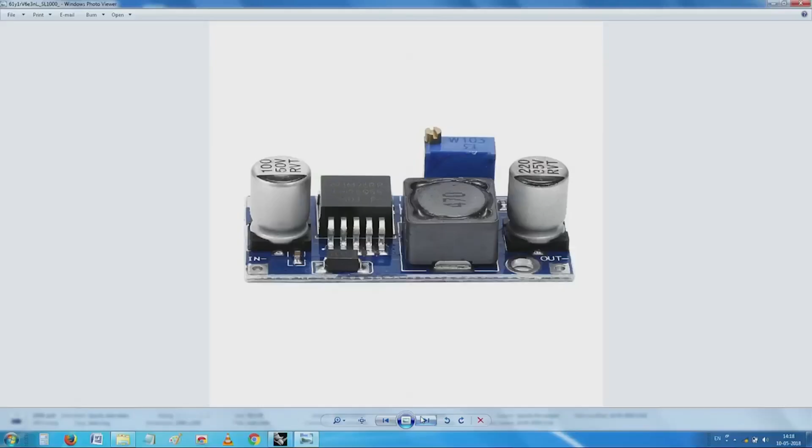Hello. So, though this lecture is a little to do with 3D printing, we still have a starting point where we need to start. I just thought I will remind you from where I left off here. You see here, this is the original 3-pin series pass regulator.

You will notice here in this case wiring and the whole thing is relatively easy. All I have is I need to make a little bit of insulation here. I have heat shrink sleeves, then there is a reverse protection diode, and the whole thing has been nicely enclosed in an aluminum box. You see here, and I have an advantage here. The moment it is made of a conductive material, in this case aluminum, this whole thing is very cheap. Probably to fabricate it costs very little, and then in the shop maybe it can be sold for 1 rupee, because it is not any specially designed extrusion.

It is just a long aluminum C channel that is cut, and then a hole has been drilled. Only thing is, in this case for our safety we have made a special clamp-like thing, and we have pasted it, to ensure that there will not be any shorting. So, overall a linear regulator is very cheap, there is no problem, and the main heat dissipating component can form the box also.

However, when we switch over to any of these elements, like these two elements, these are all switching regulators. You have seen this, no? It is about the same size as this, there is no problem. That is the reason why in fact I picked it up. The switching regulator also is about the same size, except that it is full of electronics and full of places where it is likely to get short circuited.

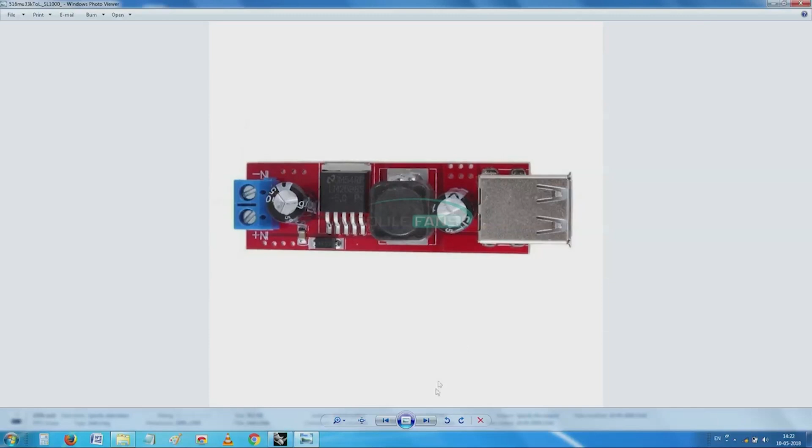So, in this case it is probably relatively easy for us to just fabricate a cover, and there are no electrical connections involved. In fact we can make a tube-like structure, perhaps take a tube in which we can push this through, and on one side we put an insulator, and overall we are in good company. Making an enclosure with our rapid prototyping for this is relatively simple.

All we need to do is take the dimensions of the box outside, this dual USB thing, and miraculously they have made all the dimensions such that everything is within that height. So, a tubular structure is easy, and then the tube can stop here with a step if you want, otherwise you make an opening, make a barrier, and then you have in and out like this. There is absolutely no issue about it at all.

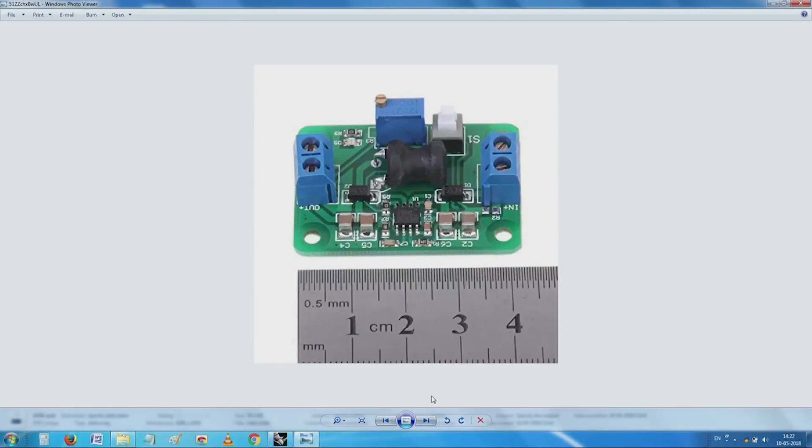Now, you see this is a slightly different thing, similar concept, except that both in and out have these screw-on connectors. The advantage of screw-on connectors is no more wiring is required, no more soldering is required. So, if I make an enclosure for it, I can ensure that the enclosure nicely sits here, and again for our... sorry, I hope I have not deleted it.

For our convenience and to avoid engineering drawings, I will tell you why the engineering drawing issue is. In fact, they have put a workshop scale and photographed it, saying what you see is what you are likely to get. So, it is easy for me to see that this right edge is going to be around 42.5 millimeters, absolutely easy. And then the same thing with the other dimension also.

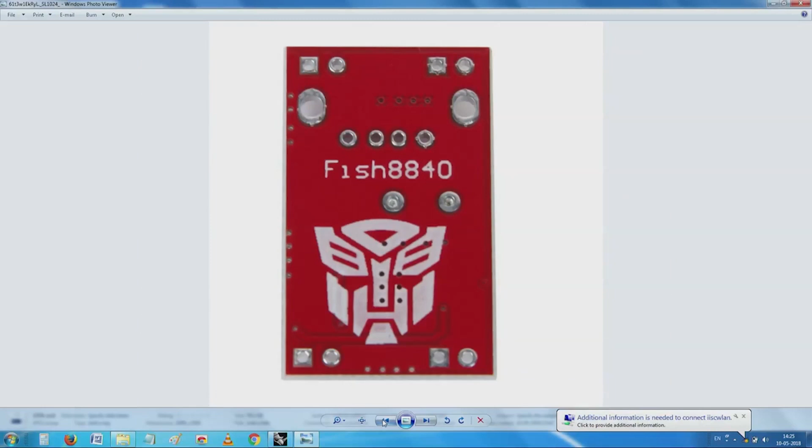Now, you see at the back, we have again the same 2 mounting holes, and there is a provision here for probably a heat sink. I won't say it is a heat sink, if you go back you will probably check whether something else is included in that. You see here, yes, it is for a heat sink only. So, we see here the actual chip is here. This is a toroid, or a transformer to increase the thing.

So, after you look at it, these 4 holes may be for via holes, and then you see carefully everywhere this red thing represents the copper. So, this copper has been made such that things are very nicely done. Now, let me stop here and show you these 2 things. Have a look at these 2 things.

Sir, can you get us a closer look? They look about the same, is it not? If I now twist it, they look about the same, except that when I turn it over, you will notice that the mounting holes are opposite. It is not about twisting it. If you twist it here, you see, still they come in the opposite direction. So, this is the case where making a general purpose enclosure is a little problem, where our thing will help.

Can you see here, we have the mounting holes here, one hole here and one hole here, top left, bottom right. In this case, top right, bottom left. So, if you follow the particular sequence which I have shown you, including the outer enclosure and all that, then have a look at these components here also. You will notice that these capacitors are taller. They are projecting beyond the surface.

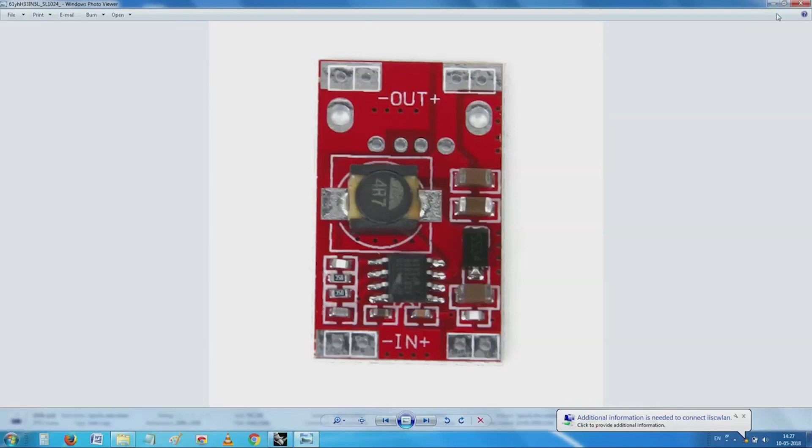This is where it helps for you to modularize your design. Have an outside box, have the mounting studs separately, and have a heat sink position separately, and so on. Now, allow me to go back to the drawing stage. I brought you and probably left you here yesterday.

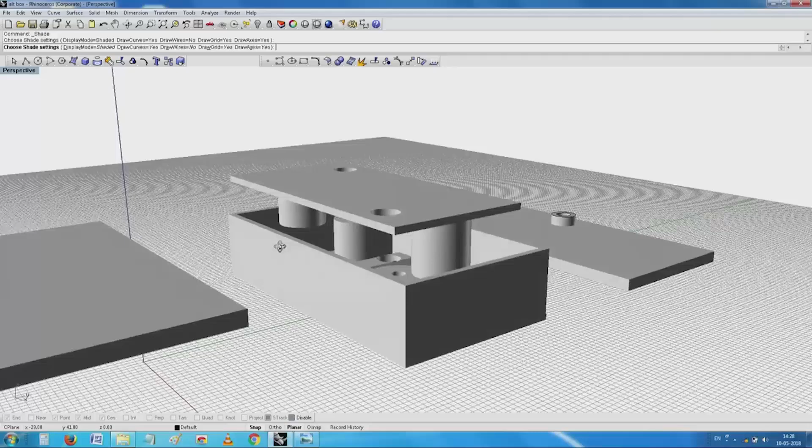So, I have a printed circuit board which has 2 openings here. Then I have a small aluminum plate, just loosely shown as if something is attached. It is not attached actually. If you go and push it here, it is very convenient, it just goes on top of it. It goes and sits on top of the printed circuit board.

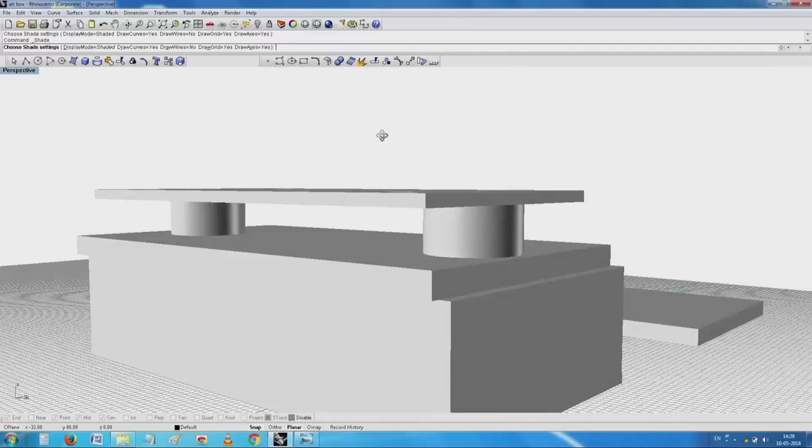And makes a contact. So, maybe if I put it in this mode and then put it in the 3D shaded mode, it will probably make more sense. So, in the shaded picture you can see there. Only for convenience I have pushed the printed circuit board up. Now, I will push it down for you.

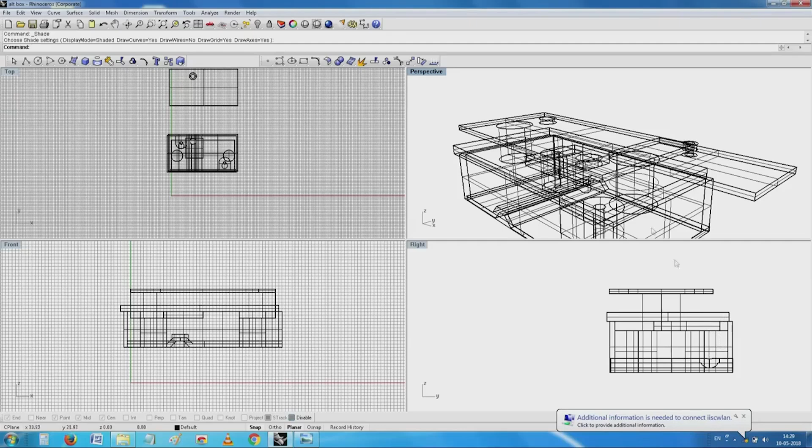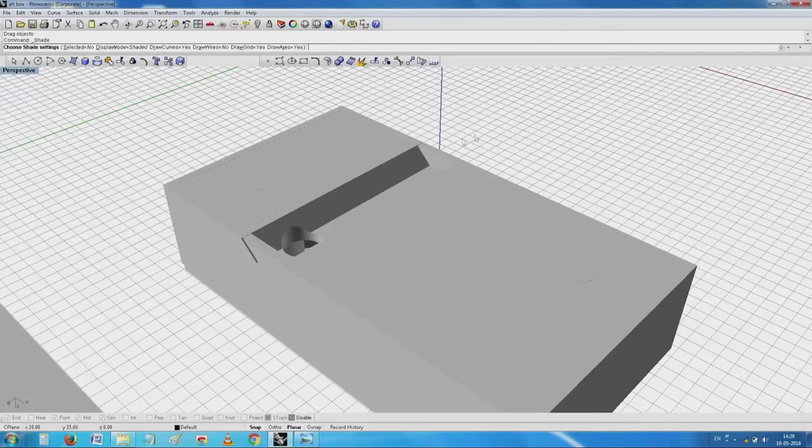And one thing which was quite okay, and now I will just show you why it is not okay, is this very fancy opening I have given here, thinking it will make it look good and maybe people will want to buy the product and so on. See this here, I had a tuning thing and then this was kept here saying it will help.

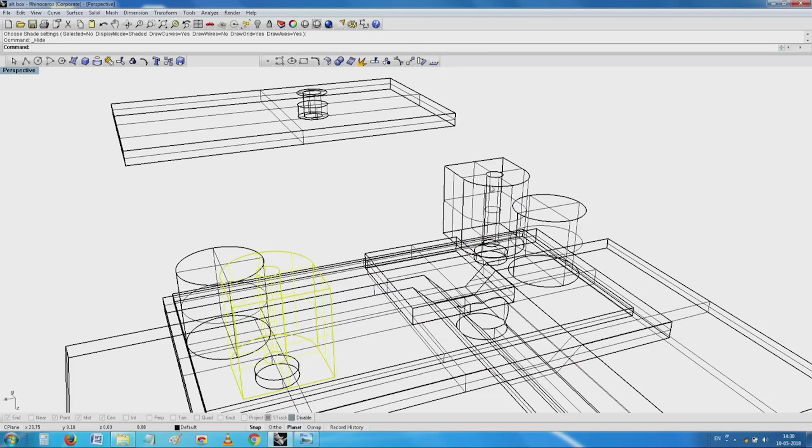Now, we come into the little bit of problems with construction of anything which involves this thing. I will now hide this to make sure that it will not interfere with our arguments. Now, you see why I have kept these bosses separate. These bosses are kept separate such that depending on the batch of the printed circuit board I have, I can move them to align with the product that we have got, because it is likely to be different. Anyway, right now I will hide them, I will hide the printed circuit board also, and just for this thing I will hide this also.

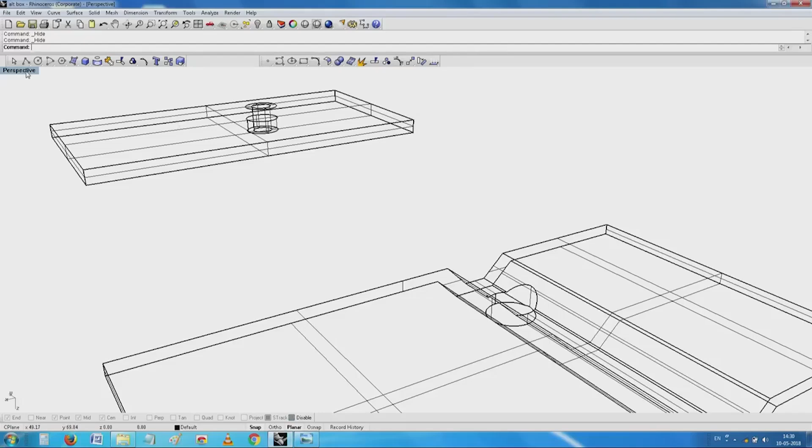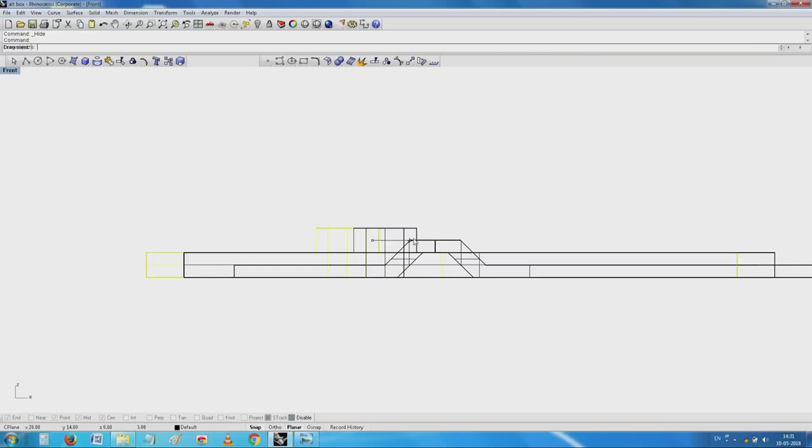Now, here we get into a very interesting, I do not know whether you should call it a problem or issue which needs to be solved. See, if I were to build a tapered piece like this, and which is again in reverse, you see it is part of the box. The building up will start now. This is the bottommost layer, the build up will start.

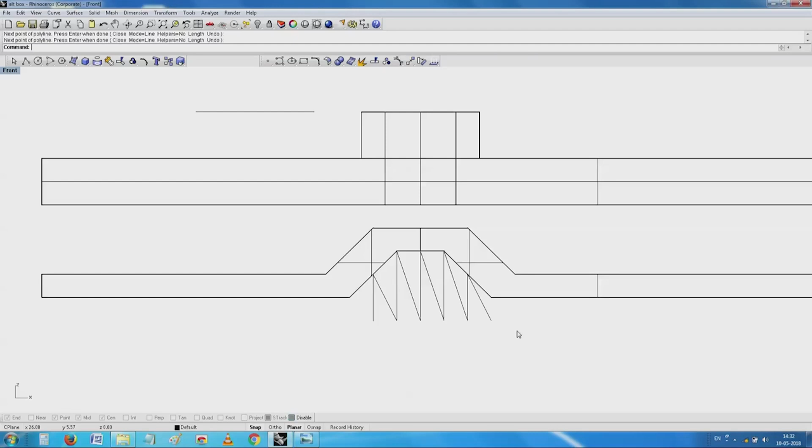Now, we have a very peculiar, you see here an angled surface which needs support from the bottom. So, the algorithm there will try to build lot of support material here. Just to make things easier, I will just try to draw a polyline, and you see if this were the base, the support material will start being built like this. Which is incidentally a big waste of effort, and further you will not get a smooth edge as we have shown here.

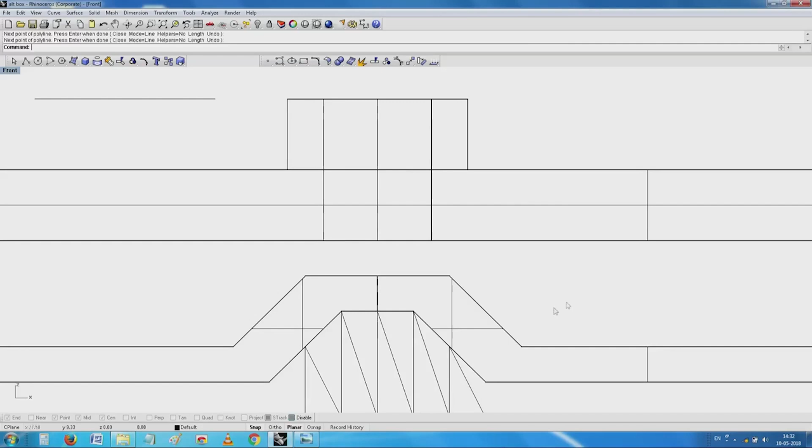It is fine because the algorithm itself takes layers, and the thickness of the layer will represent the z direction granularity, and x and y resolution will depend on granularity in the other direction. So, we may or may not be able to support. This is just a waste of material. So, is there a way of getting over this problem? So, probably the easiest way of getting over the problem is, first of all, find out whether this is really necessary. Do we need to build a very complicated structure like this?

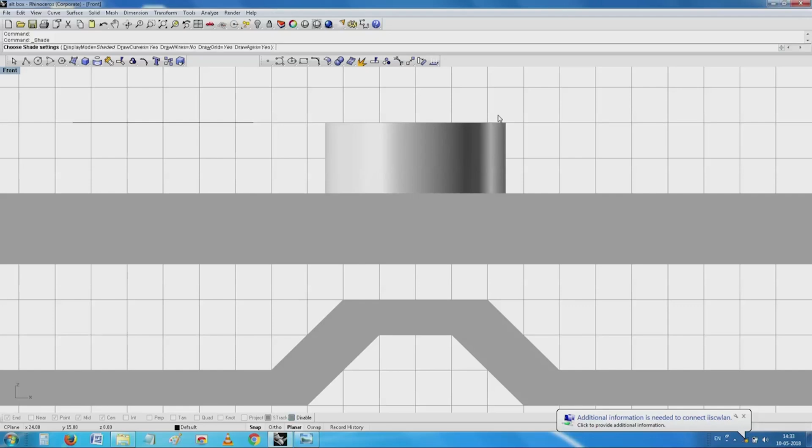Reality is no. While in injection molding once upon a time, with a little bit of aesthetics and industrial design, it made sense, similar function can easily be achieved. Instead, if you just make a cylindrical structure here like this, but then one thing you notice, there is no fillet here, and right now for convenience sake we just made it straight. Advantage being the layup will start at the bottom, and then slowly after this thickness is built up, next layers will start building here. And it does not matter, even if in the plan it is circular, it is not such a big deal for us. See, even in this view, if it is circular, it is not a big problem for us.

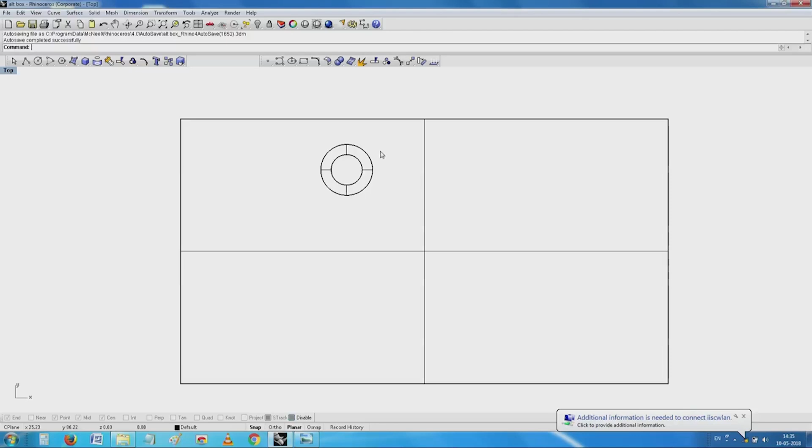So, the fused filament device, that head will start building up all these things. Once again, depending on how energetic you are feeling, probably making it a square also may make sense. Just make it a square, same way here, just for convenience I have made it a circle. Nothing prevents us from making a simple prismatic object into a square, because building up is easy. Otherwise every time it goes and comes back, a little bit of jaggedness will come here. Is there any other way? Yes, you make an octagon, make a square, or make something, because what we are interested in is the center hole here.

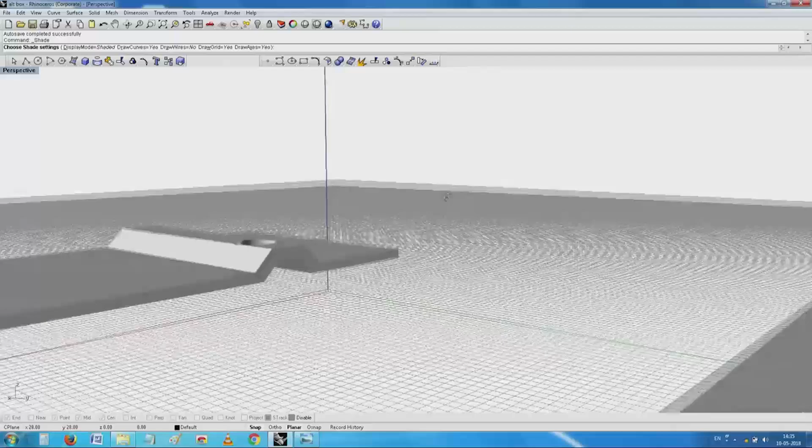Now, you see, building an object like this is relatively very simple, and the amount of support material and the amount of time required will reduce tremendously. I hope you got my point. My point being that if you make all that fancy things which are required maybe in mass production, in this case we can optimize very well to do this.

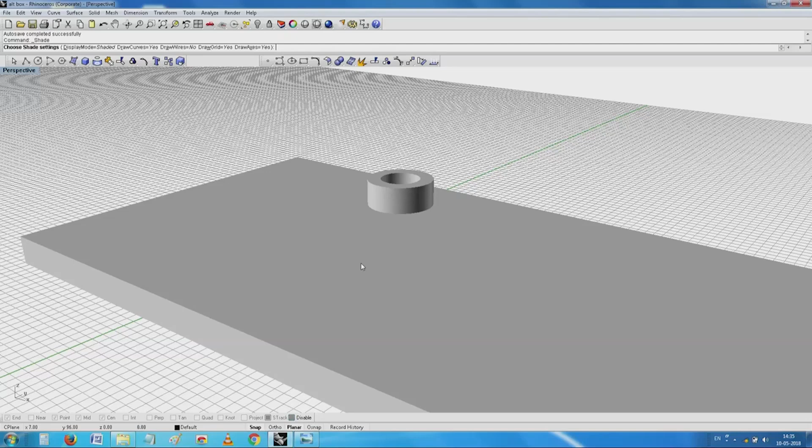Let us say you still liked the concept of a groove and it looked fine, instead of sticking to this vertical inclined thing, maybe some other way we can make. Why not convert it into a vertical channel? Maybe you can convert it to vertical channel, make it like this, and then make the hole the appropriately correct size.

Further, you will notice when I try to make a hole, the solid modeling package has made something that looks very cute. You have seen this, no? A really cute looking thing has been made, which at one level, while it looks good, we do not know how well it actually builds up.

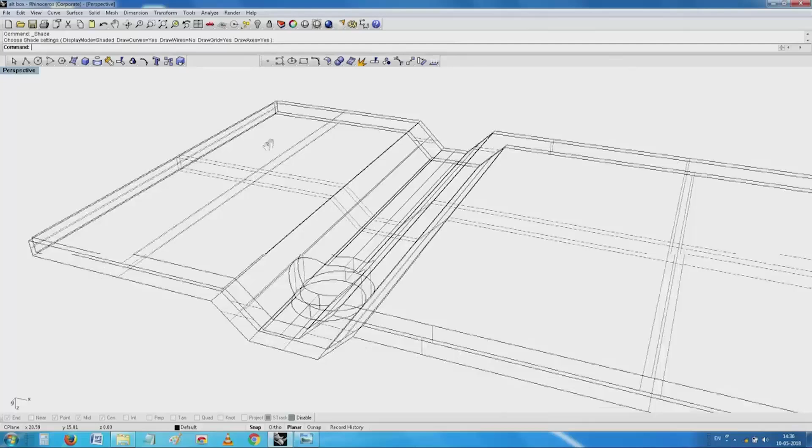See, nice, no? It looks nice as a thing, but all this here is probably misplaced, meaning you do not need that type of thing. All you require is a nice groove. In contrast to the groove, the other circular feature is equally good.

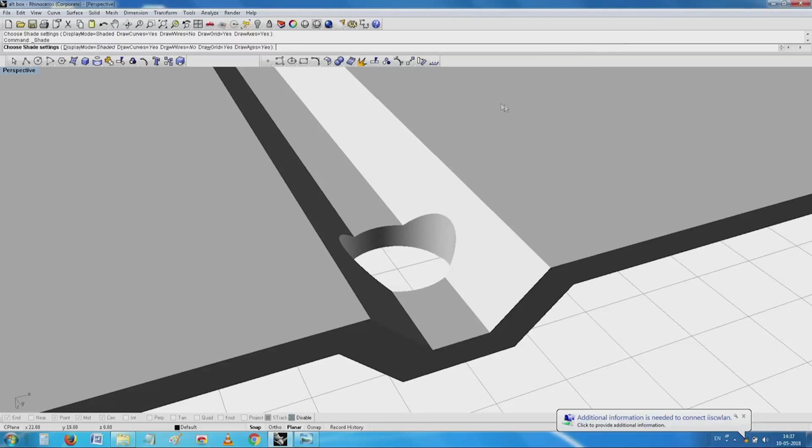Now what I will do is unhide all this whole lot and see what is sitting where, then put it together and see what best we can do. So this one, no, I will just delete it. Right now I do not want it. Okay, this stuff I still have.

Slowly I am reaching the point I wanted here. See that, except there is still some minor thing there. This top has not aligned itself perfectly, but then it is okay.

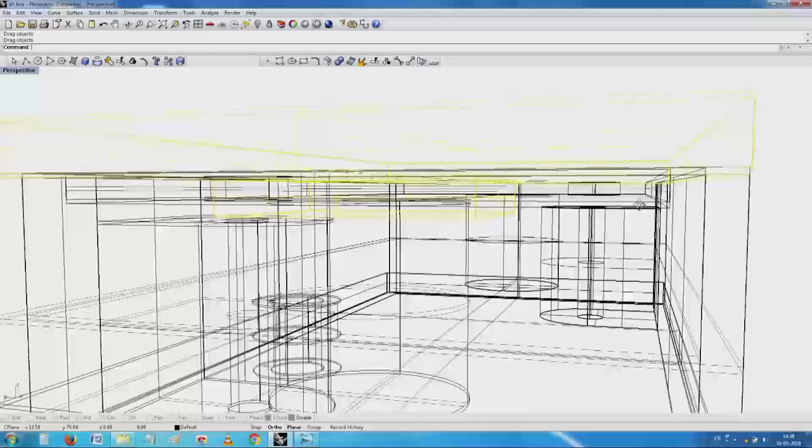I'll just put up with it for the moment. I know how to correct it. Eventually I'll put up with it. So I have got a heat sink device here.

Just fine. No, I think I'll improve it. I'll just delete it and start with the proper heat sink device, and then again one more time I will start with the surface, which will start with a plane, corner to corner.

This is my heat sink proper, this is the cover. I see if they are Boolean themselves. Fine, nicely it has got Boolean.

Now I have got a reasonably good looking box with a place for the printed circuit board to sit, and then I have got a heat sink which will go and press on that, except two features here.

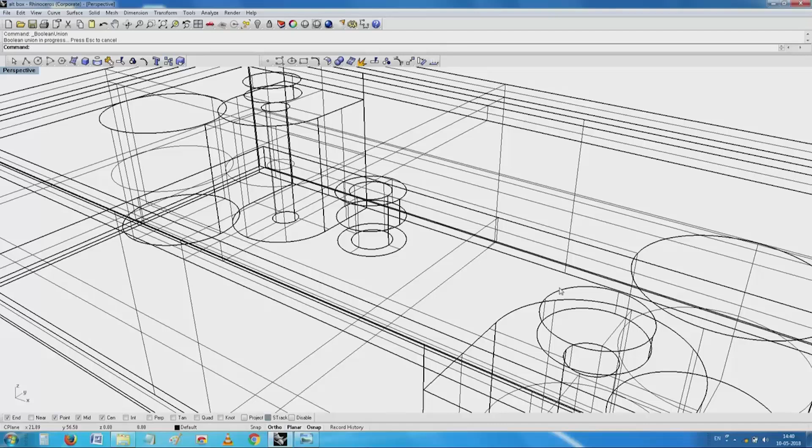That mounting hole of the printed circuit board has not been transferred here. So what I will do is, since I have got the bushes in place, right now I will close the printed circuit board, make use of these two bushes and then extend these holes there.

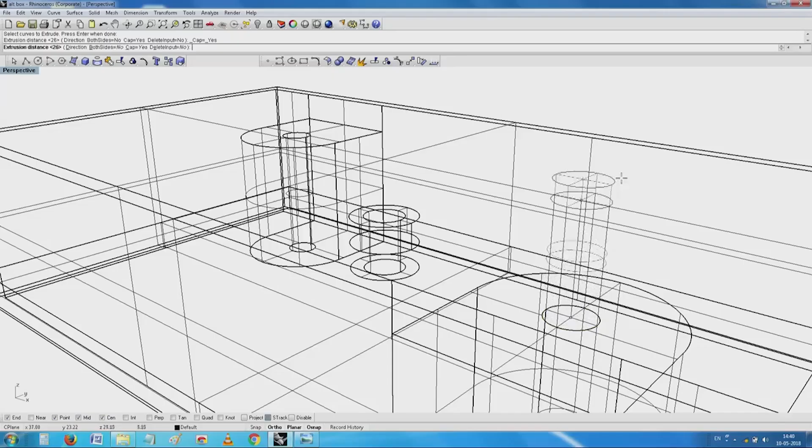So what I do is I try to create a solid using a planar curve. This is the planar curve. Same thing happens here.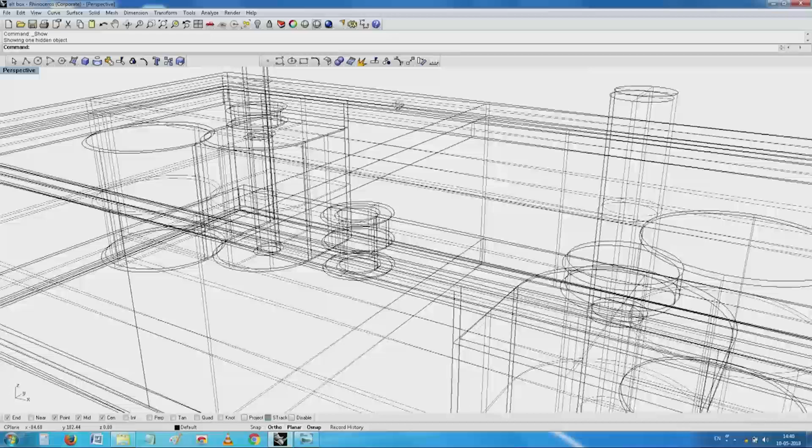You see here I have got two things which will eventually be made into this cover. So this is the cover I have created just now. So I have transferred those holes to that, then I will do the difference from here.

First set of holes, second hole I will create here. See, now I have a reasonably good looking completely enclosed box, and there is a place here for me to tune the printed circuit board.

Remember, the PCB is being mounted obviously upside down. Can you please show this, sir? I have a printed circuit board here, the heat sink is sitting from here, and the other side is where the tuning and so on will come. So the thing is being built upside down like this.

This is how the device will come, this will sit here, and because I have got these two mounting holes and these bushes, it will go and sit on the bush, and the heat sink will sit here, and the same holes which are given here are given on top.

Now I need to take a call on what to insulate inside. Do I put a small insulating layer, and something equally important is, do I pot the whole thing? After finishing this, there are thermally conductive but electrically insulating potting compounds available.

So I nicely put everything and then inject the potting, some are two-component, some are single-component things. Once you inject it and put it together, it has two benefits.

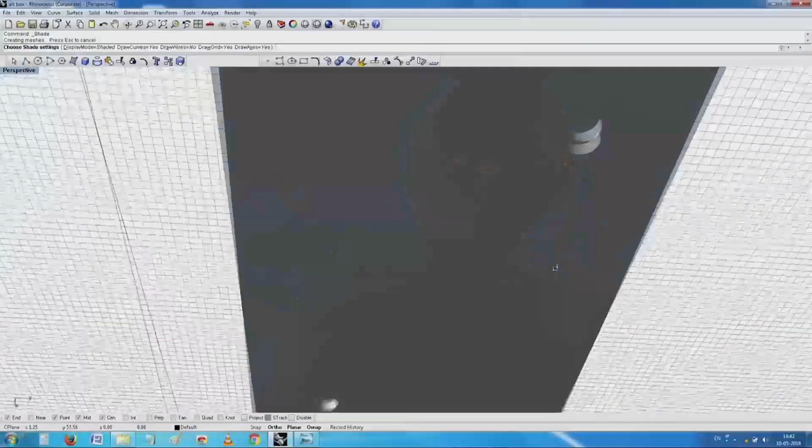Okay, that is the bottom portion. This is the heat sink part. Heat sink has holes. I will now hide this, and this is how finally...

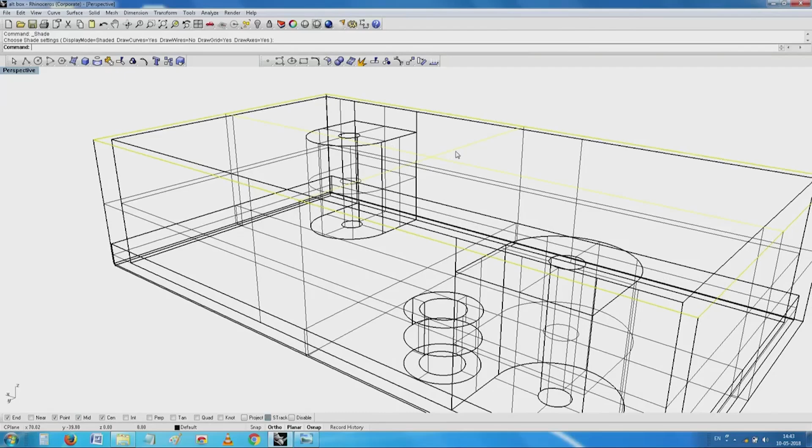This is going to be my final job which I am going to fire on the machine. It is a little simple, looks really quite nice, except the first thing you will notice is, sir, why is this boss so big, why is it not bigger or smaller. This is where you need to take a call. Logically the same amount of material which I have left here is sufficient for here.

Typically a minimum of 4mm, 3 to 4mm is required, and this hole is for having a self tapping screw which goes inside. You understand? Self tapping screw which goes inside, and this one and so on. Why I have made it a little bigger than normal is so I have a nice area where it sits, the maximum possible area, that is what I have included here. So it looks big, but there is no reason why it needs to look big.

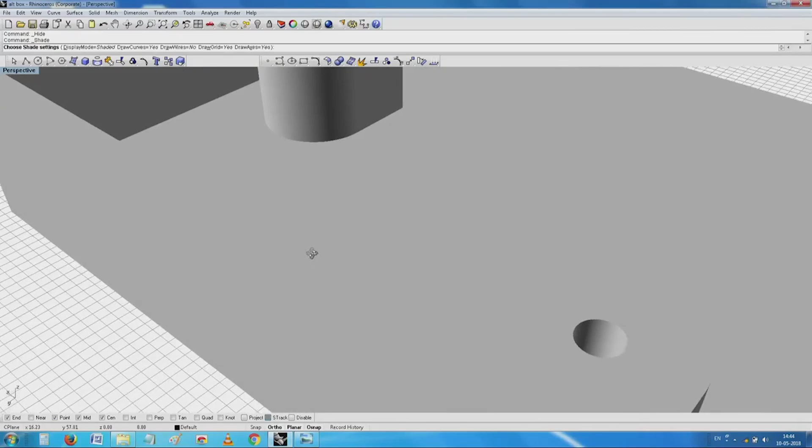The main difference between this and the injection molded part is, if we were to make a part like this in injection molding, one of the first things that will happen is, because of the large cross sectional difference, we end up with huge sink marks and the material will not flow at all. It is a very poor design for an injection molded part. But in the case of making a quick good prototype in 3D printing, this is probably the best way to make things. You got my point? This is where the slight difference is.

Right now, for some reason, this refuses to get unioned with this. I will see whether it will still continue or if they just do not like each other. It got union, no problem. Hey, very good, surprise.

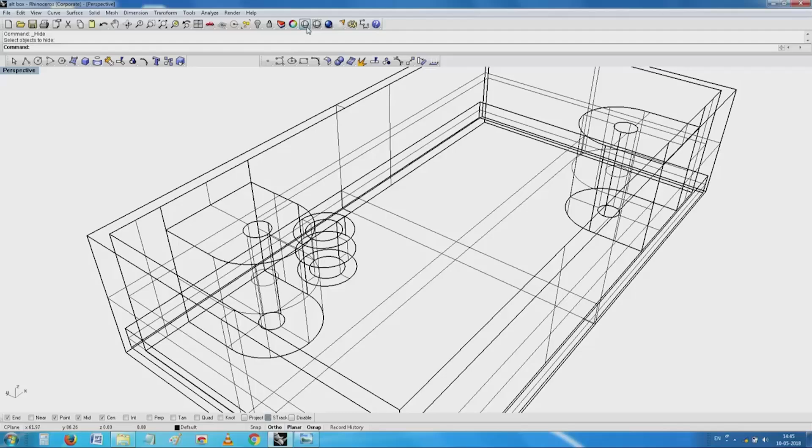So I have got a beautiful object here, the whole thing is integral, everything. Now only this bottom portion, I will see if I can attach it to this, and then I will show you some other interesting objects which you will like here, solid. Then we have a union. Good.

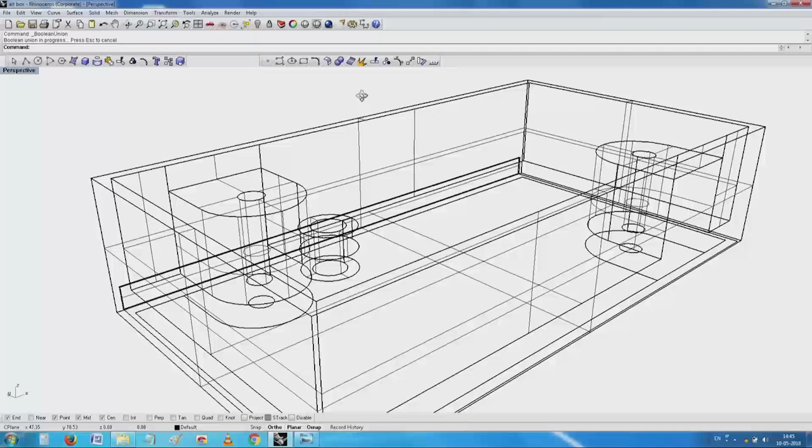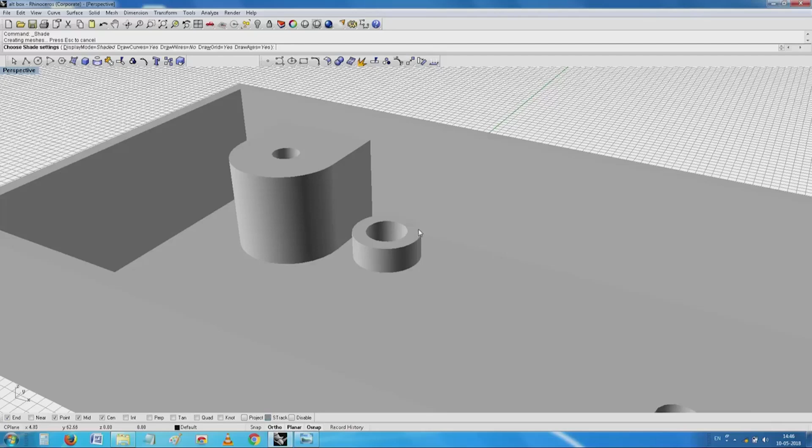A little small error has happened, do not worry too much about it right now. The whole thing has turned out to be a single object, because of a little projection probably that has happened. Now to make this a little more, let us say if this were to be made in injection molding, we will invariably end up having to give fillets here, otherwise it becomes very weak or stress concentration will occur. In this case also, if you suspect there is too much force coming here, it may be possible for us to give fillets. Okay, loosely I will try, just one surface, I will try to fillet and show you how it comes.

Yes, I have a smooth fillet there. You have seen this. I will see now whether I can do a similar fillet here.

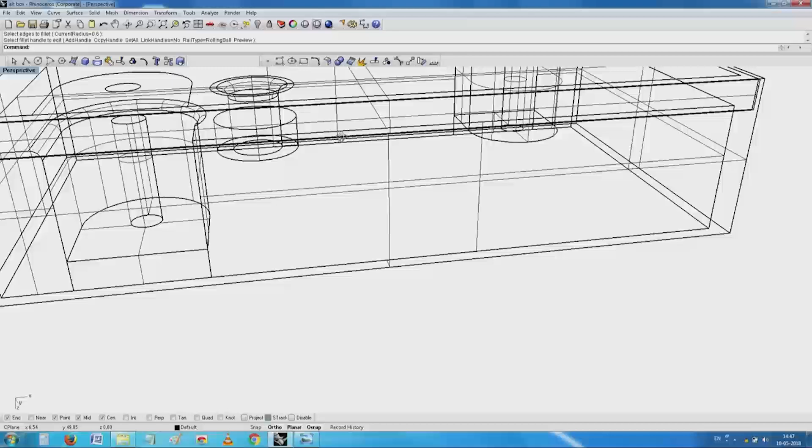Seen here, what looks like an obviously cute fillet has happened there, and correspondingly on the inside thickness, see here in the inside thickness I have one more time. This is conventionally what you are likely to see in an injection molded part, except that as I told you, it does not build well when we come to this thing. So we avoid these things as much as possible. A much easier way is to have steps. Steps are much easier to build, even chamfers do not build well, in spite of whatever the manufacturers claim.

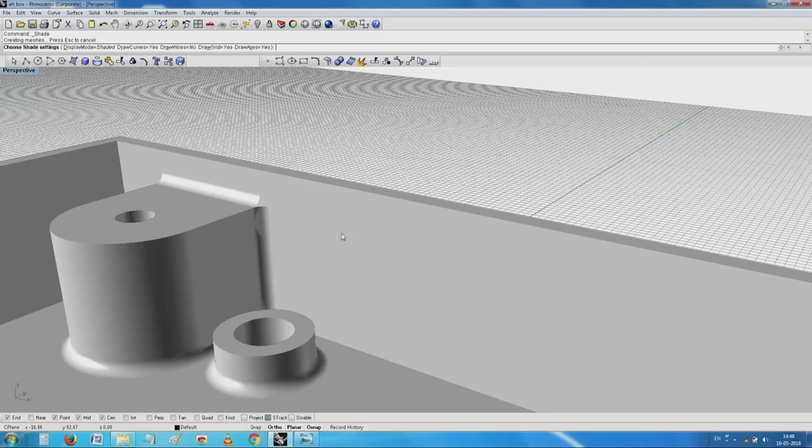See here, at least it looks nice, and it does avoid the stress concentration which is likely to occur, the same as we have in the other thing, except here now you have to take a little more care to see what best we can do about it.

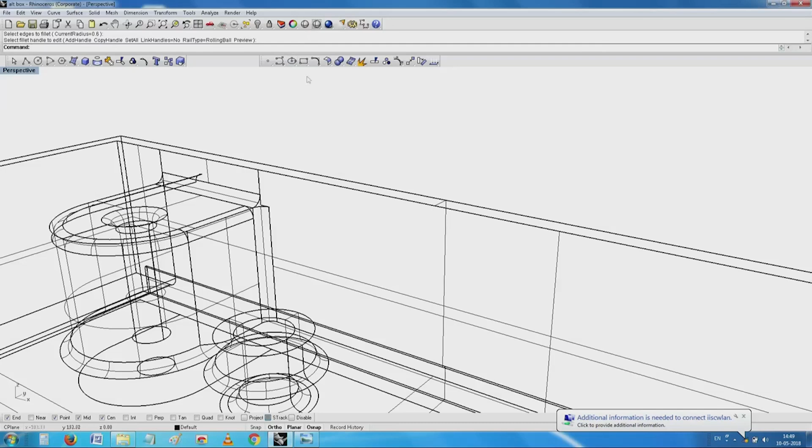See there, it looks quite okay. So right now I will stop this particular experiment here, then I will try to take on just a flat piece and show you how we can attempt to build these things. So I will start with a fresh drawing instead of... see, as before I will start with, what do you call, a surface, probably a plane.

I have a beautiful surface here. Nice surface, then I also will make a small curve to build this. Imagine this is the pilot hole, and then I represent the material thickness here by this. So I am just creating a step here and trying to see how well I can create a solid.

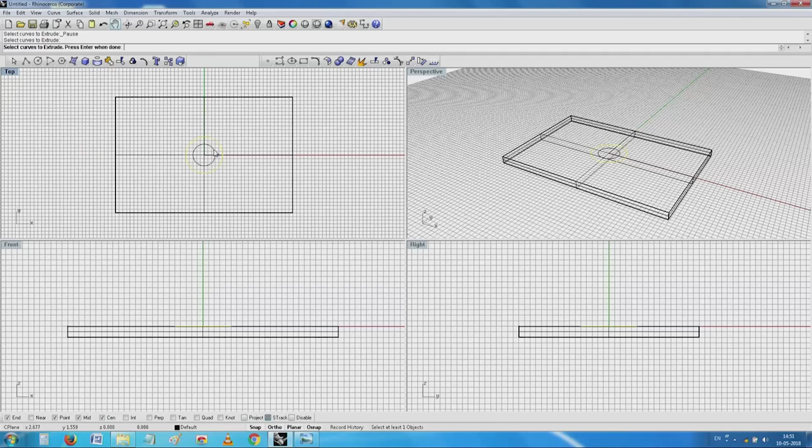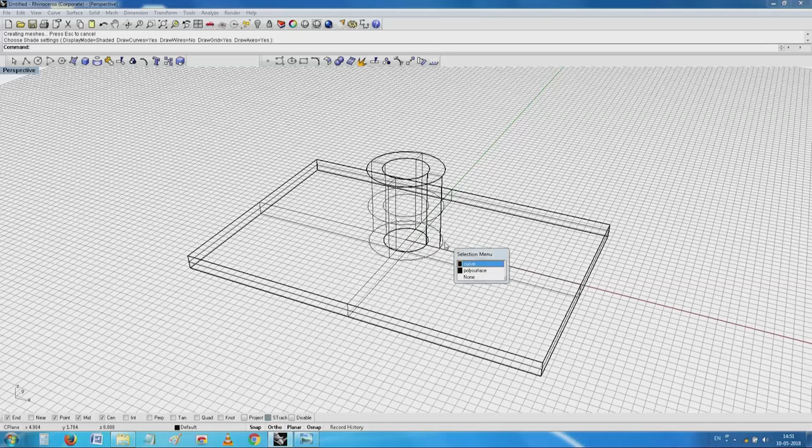See, this is a very simple conventional thing here. So this is where I thought I will spend a little more time with you. If you have to just fillet it or even chamfer it and do it, it does not build well. Instead, our experience has taught us that I will start here, you see that circle is still kept there. I will try to make a small offset out of it.

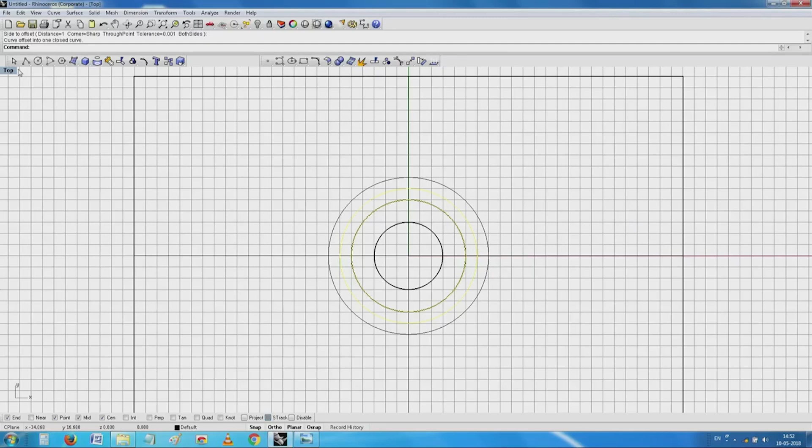I will build a small step here. Next, I will take the next two circles.

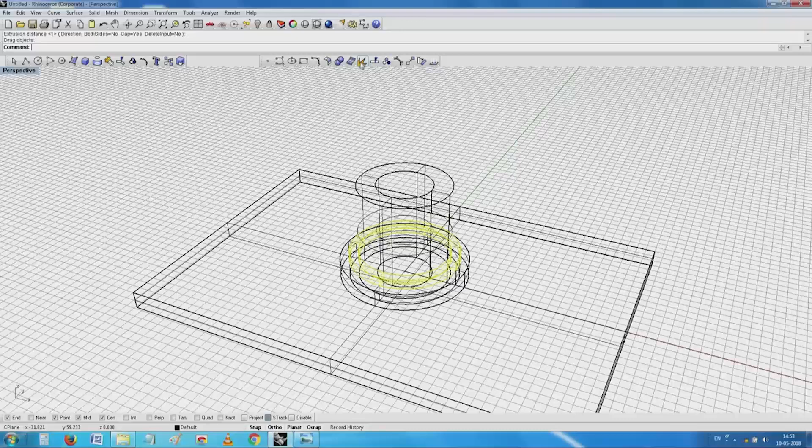This in general is a much better way of creating what is equivalent to a fillet. I have just exaggerated it intentionally. Generally, if you have 3 times the resolution they talk about—if it is 0.1 mm, say 0.3 mm diameter is sufficient—and then the same thing here, if the resolution they claim is 0.2 mm, make something which is around 0.6 mm width. So we have 0.6 mm width here.

Now, same thing about the building of the layers. If they say the layer resolution is some 0.5 mm, make at least 1 or 2 mm like this. A design like this prints continuously very well without any problem. Seen this here? Prints very extremely well.

Since I have not unioned it, I still have an option of playing around with it and see if I can make this hole through.

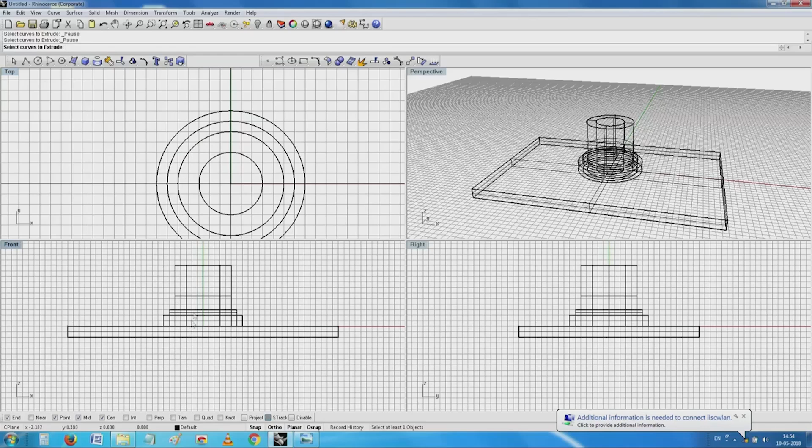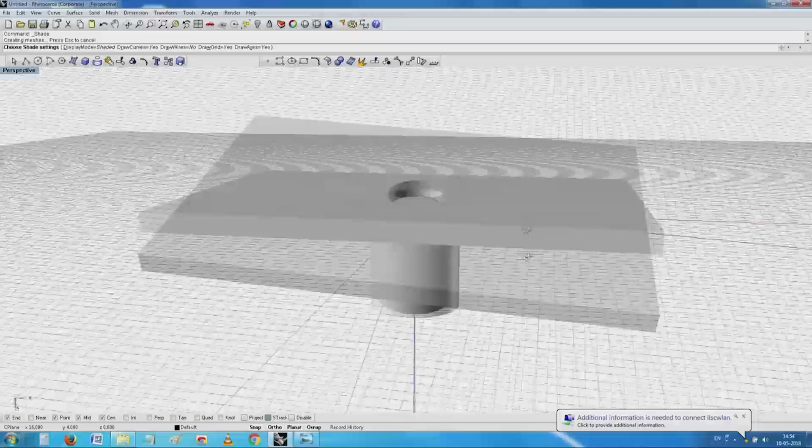I am just completing that hole there. See, I have an opening here. This is probably what we wanted, and we have achieved it. There is no problem at all. I have a beautiful...

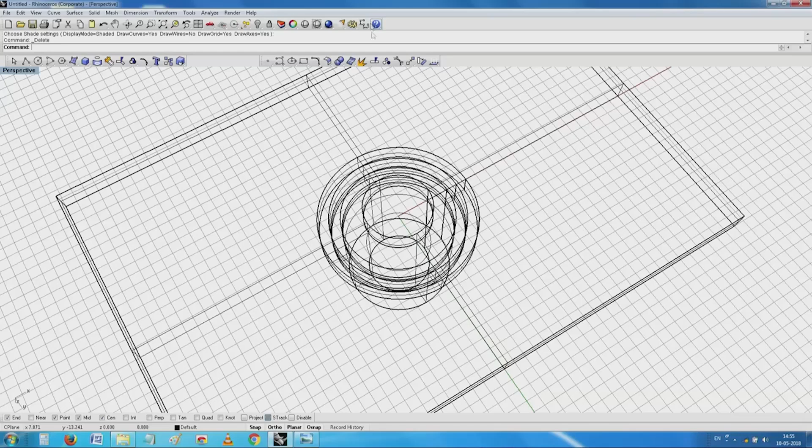An object with an opening like this, and once again same consideration what we have—generally we would like to have a smooth surface. So having built up this inside, we have a little provision here. When we see the cross section, we can try to make the cross section as convenient as possible.

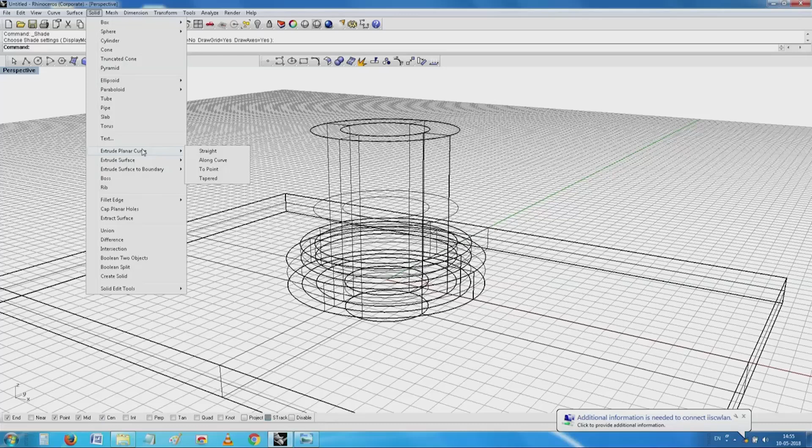So I will probably use this inside. If you see, I had this whole thing, I will see if I can use it for creating one more thing here, saying I will create a solid using one more of this planar curves. I have a planar curve here, and directly...

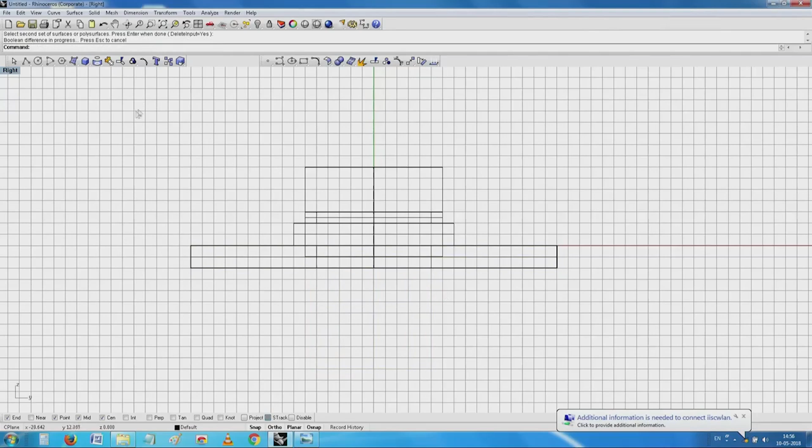Now when I turn it over and see a similar type of a structure which I created that side, now I have managed to create here. We have this here. Oh, something is stuck inside. I will see if I can remove it.

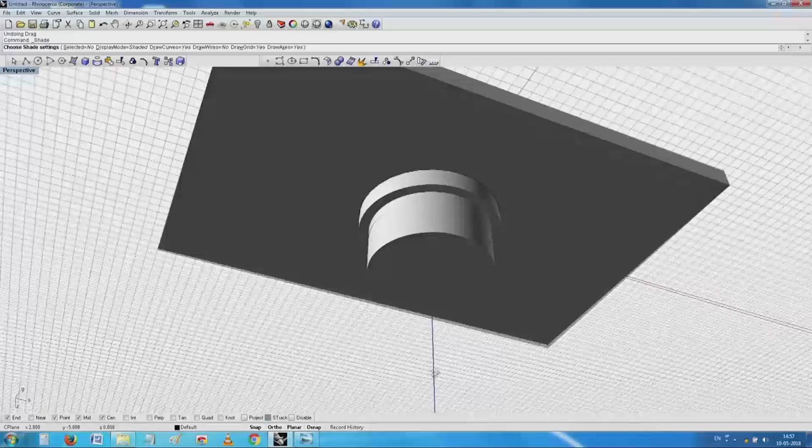I have the opening here. I only the cylinder I couldn't do properly. Now I need to take the cylinder out on the other side and see.

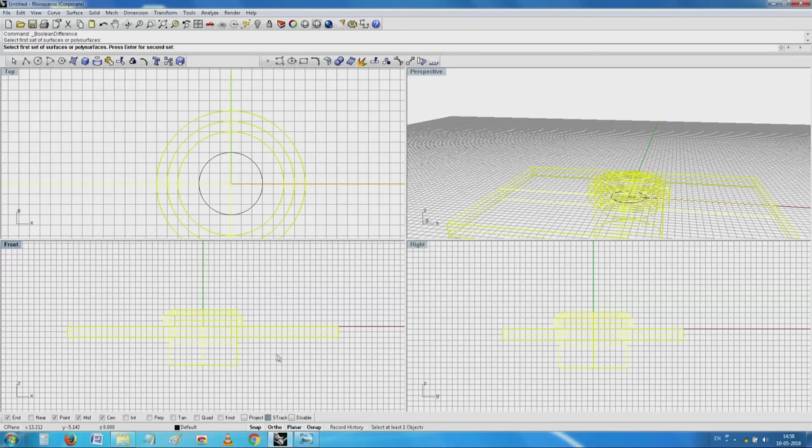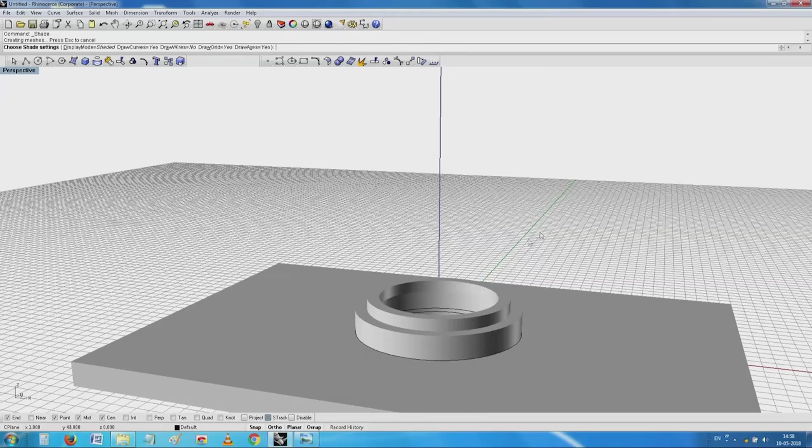I have a projection like this here on the other side, and similarly I have a step there like that. Instead of depending on a chamfer, I will try to make bigger and bigger these things here and try to, just like I have a structure here, I can have a similar structure on the opposite side, complement of it. Right now because of some monitor problem, I am not able to judge what is happening, let me check here.

No, I have lost one of the objects which I have created.

I am slightly better. I have this projection on the other side, then I have a depression here, and instead of creating a full fledged chamfer, I am able to make something like this. I can make it in further steps. So I will just try to go out and see whether instead of taking it so deep.

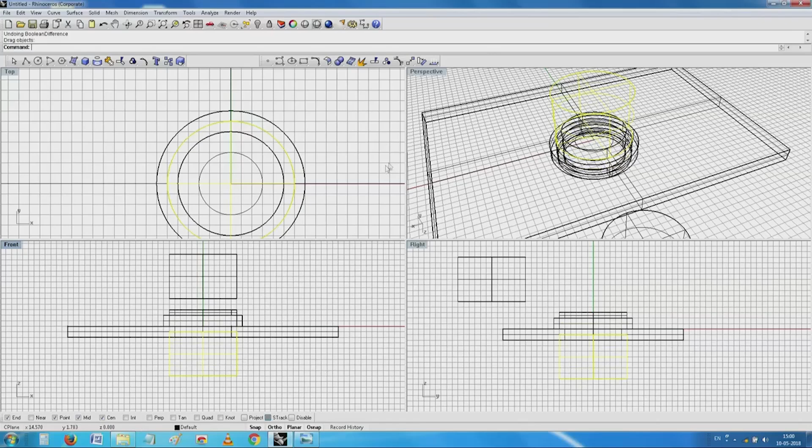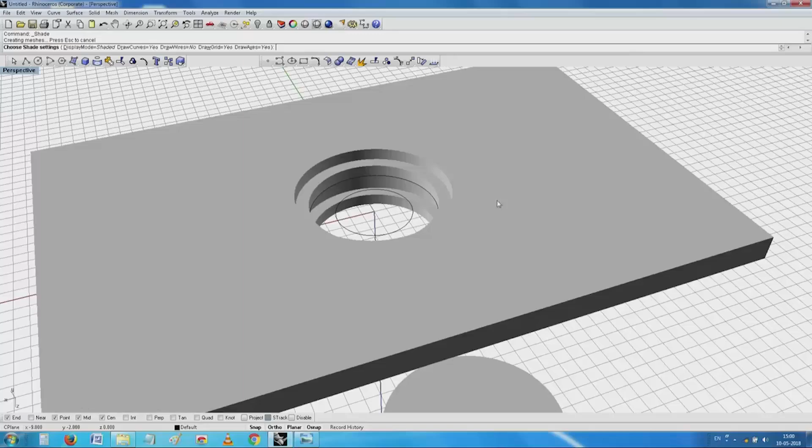Yep, I think I am slightly better this time. You have seen this, no? I can see what look like obviously a few steps here. On the other side I have this, and then whatever I wanted to construct, that cylinder with an opening inside, it is very easy for me to now construct the whole thing. And then this is the boss which I was talking to you about.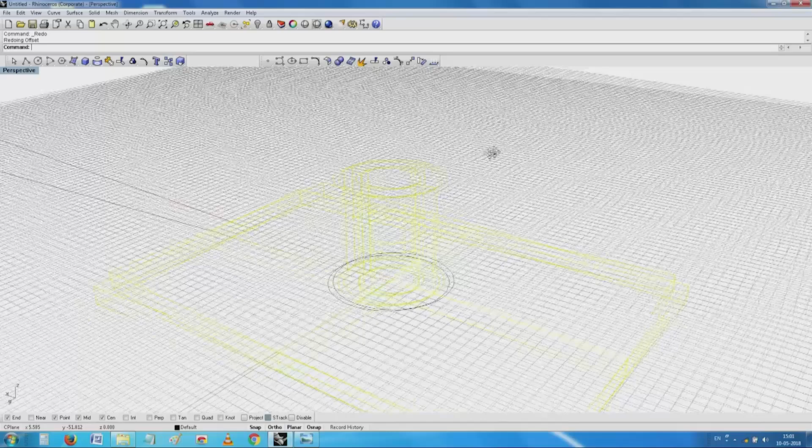The issue here is, instead of creating a chamfer, so if I go back right from where I have started, I hope it will undo all the way back to the very beginning. See, I started here saying this may lead to a little bit of stress concentration here, so some crack may start and all that. I need to fill up this area.

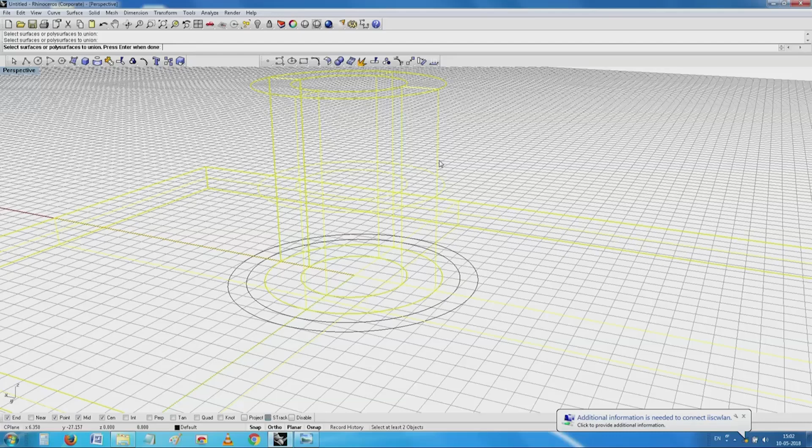Instead of filling it up with an automatic command which is already available for me, so if I boolean this, I have a beautiful command which will help me. What looks quite good here and convenient is unfortunately in the case of building not very convenient. So what I wanted to tell you is, I will try to make a small, what do you call, I have an edge here, say I take this curve and start building.

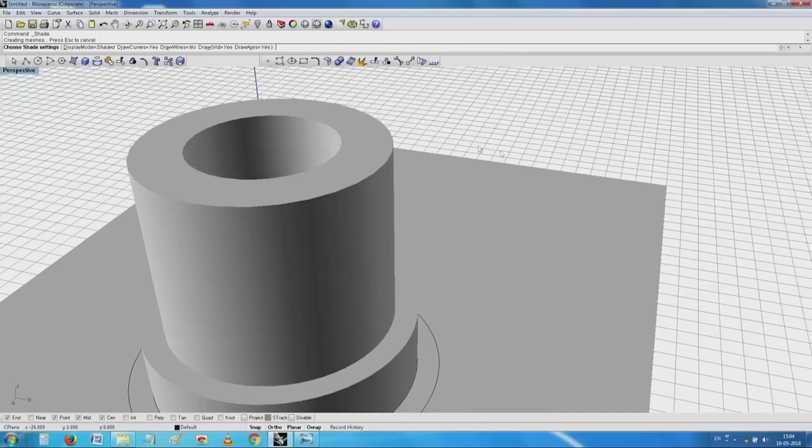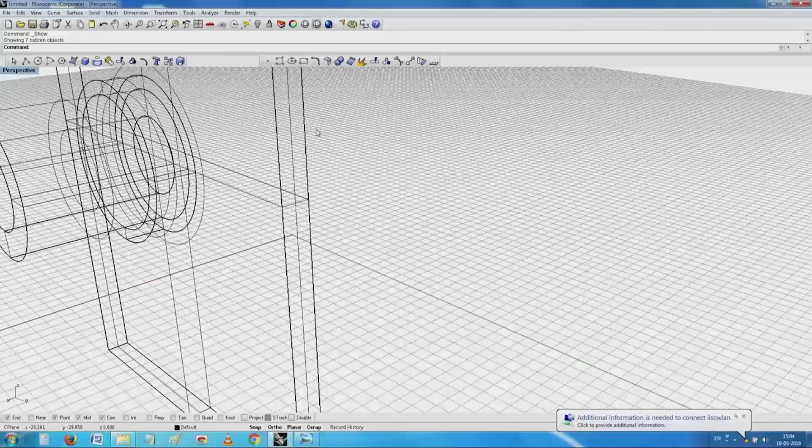The same thing, imagine this was in the horizontal direction. So instead of being like this, imagine now this, it is still tricky to build. So, lot of support material is there, lot of waste material is there, lot of other ways of building it and so on.

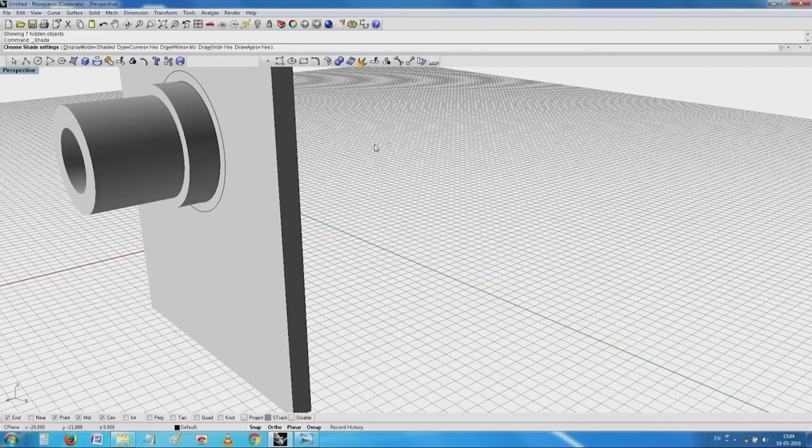Here you need to make a little bit of your own judgment and see how best you can do it, and then after we go to the machine, we will be able to show you a few things. So, for today let me keep that aside. I have come part of some way.

Unfortunately, things are very rarely so clear, saying we have an insulated part and then we have a conveniently printed circuit board, and in this case the cover of this can itself, an aluminum plate or conductive plate, can come and clamp it, and then seems to be okay. Not true all the time, unfortunately. We also occasionally end up with things like this, which are metallic components.